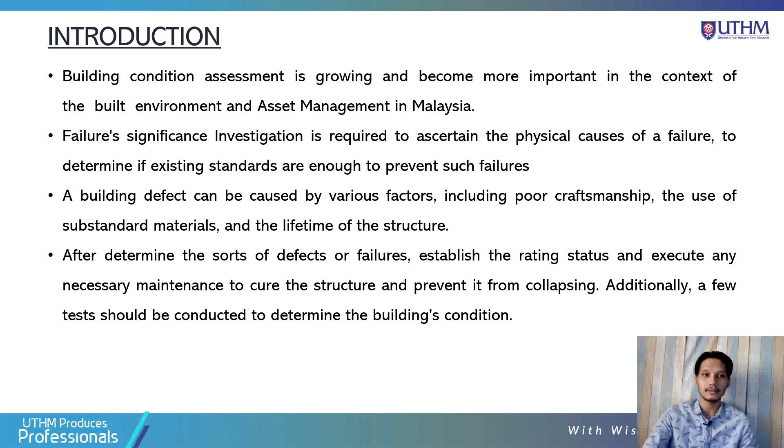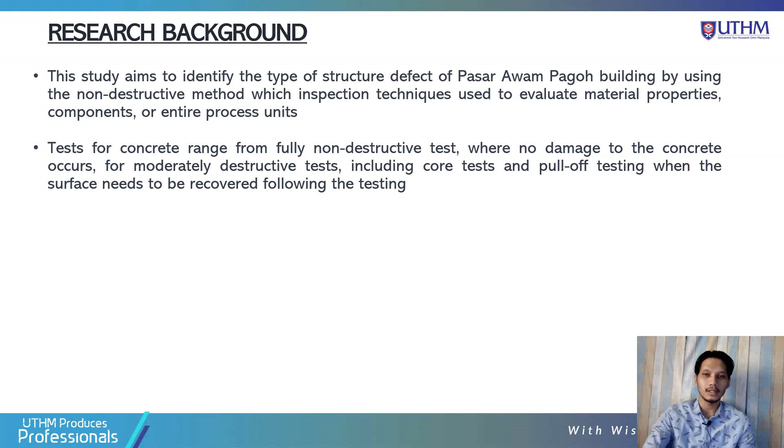Next is research background. This study aimed to identify the type of structure defect of the Pasar Awam Pagoh building by using the non-destructive method as the inspection technique. Tests of concrete range from fully non-destructive tests, where no damage to the concrete occurs, to moderately destructive tests, including core test and pull-off testing, where the surface needs to be recovered following the testing.

Problem statement. One of the most important aspects of the building that required attention was building defect. When the structure doesn't work like it should, we look for a solution immediately. The Bukit Damansara incident and the Sunday, December 14, 2008 edition of the New Straits Times opened many people's eyes to the importance of appropriate maintenance, not merely to minimize building defects but also to avoid global disaster.

According to the National Building Agency, building defect problems occur as a result of faulty design or poor construction, or the building not being built according to the design, or aspects not included in the design. Pasar Awam Pagoh was built in 1980 and it was an oil palm plantation site. Based on the investigation, the building has many defects, with some problems occurring on the building because it is not well maintained.

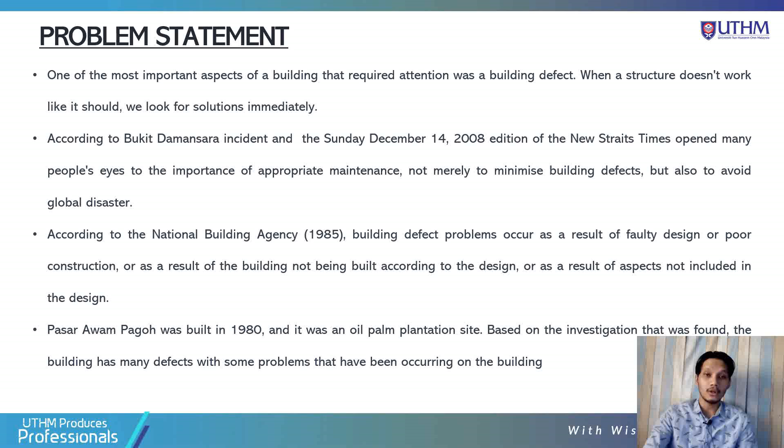Here is the objective of the study. The examination was carried out to improve the comprehension and interpretation and provide information on the available techniques and how to employ them. The main objectives of the study are: first, to identify the type of structure defect of Pasar Awam Pagoh. Second, to conduct testing of the concrete structure in Pasar Awam Pagoh. Third, to produce a factual report of the structure defect of Pasar Awam Pagoh.

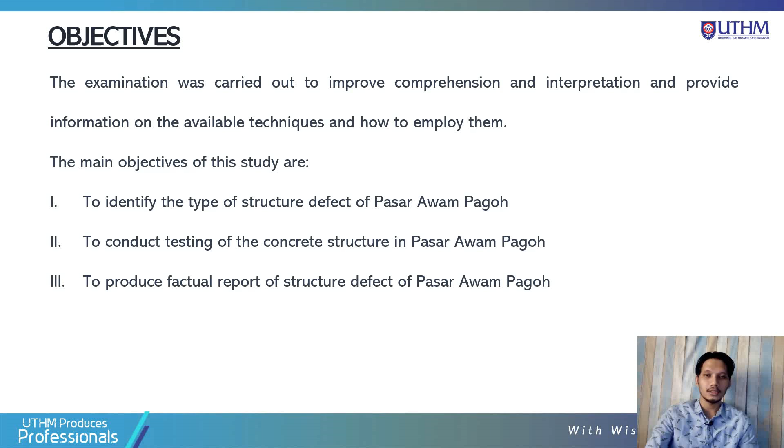Next is literature review. Visual inspection is a common method of quality control, data acquisition and data analysis. Through visual inspection, problems in a building can be broadly categorized as defects. As a result, the stage of deterioration can be classified, which is done through condition rating. Here is the table of the 5-point scale condition assessment rating by JKR, which is used as reference for this study.

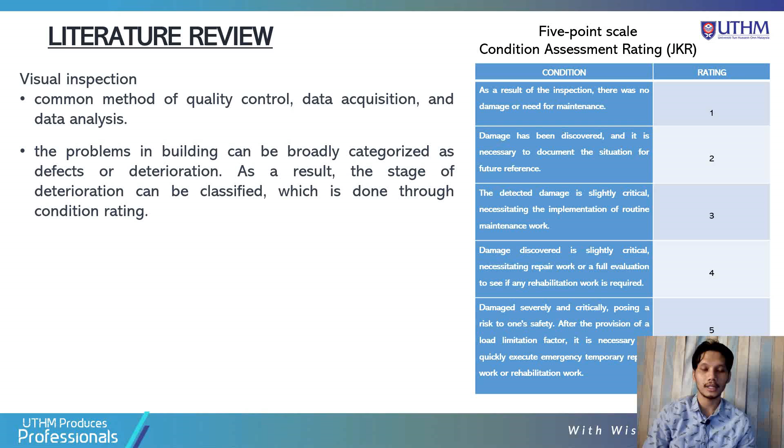Here are the types of building defect that commonly occur in Malaysia. There are 5 types of building defect found through my research. These include mold growth, abrasion, spalling, crack, and rebar corrosion, as you see in the figure.

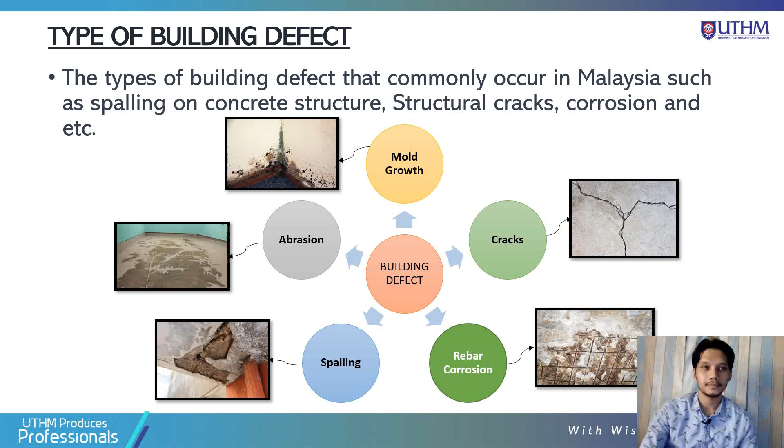Next is types of non-destructive tests and equipment. Non-destructive tests can be described as a set of inspection techniques that allow investigators to assess and gather data about a material, system, or component without causing any damage to the structure. Here are 6 pieces of equipment used for non-destructive tests. First is the rebound hammer test, to measure the hardness of the concrete. Second is ultrasonic pulse velocity or UPV, to identify the strength and quality of concrete.

Third is half cell potential, to measure the electrochemical potential on the concrete surface. Fourth is ferroscan, to determine the size and depth of the embedded material and to map the embedded material position and arrangement. Fifth, thermal imager, to detect abnormally hot electrical connections or components and humidity in the building. And finally is crack measurement.

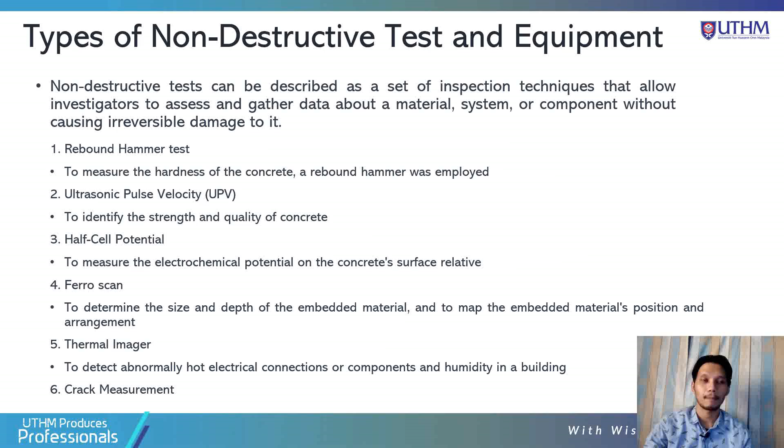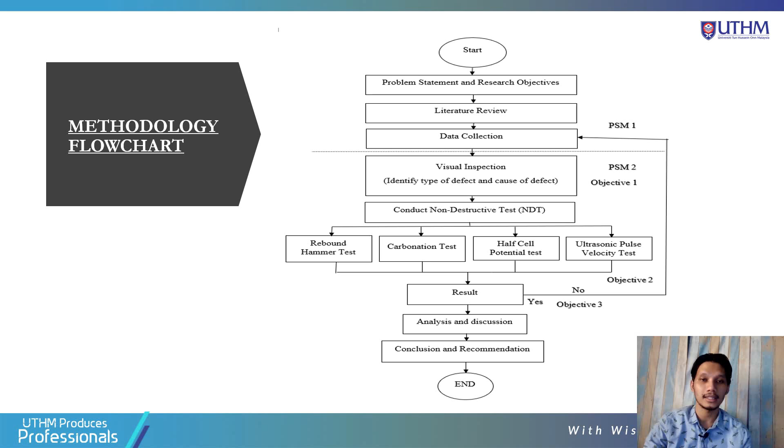Methodology flowchart. Here is the flowchart of this study, which has a total of 4 stages. The first stage is literature review of causes of building defect and methods of non-destructive testing. Stage 2 is visual inspection at the site to identify building defects. Stage 3 is to conduct non-destructive tests at the site. And finally, stage 4 is to analyze data to find out the result.